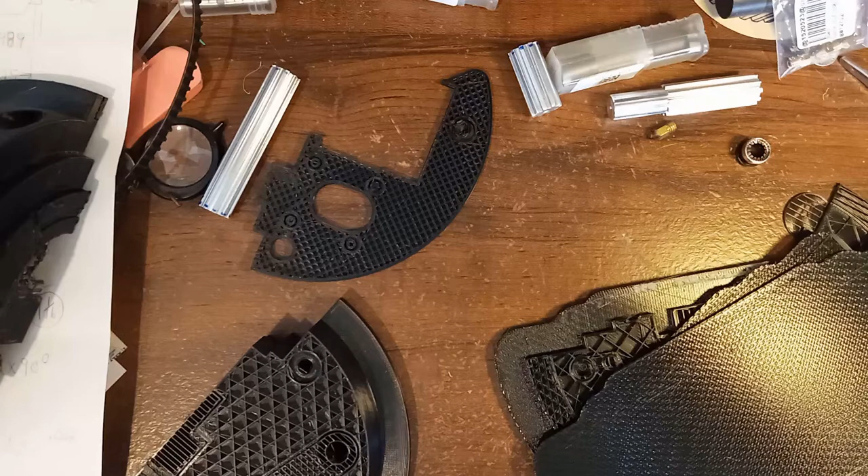Okay, I want to talk about what I've done so far. I had the 3D model and I broke it up into pieces, one half and one half. And this is the first part I printed.

And this is the one where the PLA was feeding into the tube and the tube was collapsing, and it was making this clicking noise. It was trying to feed the PLA through the nozzle, but the tube was collapsing and it was just clicking. It was trying to push it and it wouldn't do it. So it basically aborted the operation, and I almost had this done. Another 4 or 5 hours and it would have been finished.

So I fixed the problem with the tube. If you remember, I was going to take one of these. I was going to make a little extension on there. So I was going to take this part and I was going to cut it and screw it in there, put the extension on here, and then put the other piece on the top end so it would be further away from the heat source so the tube wasn't getting hot and collapsing.

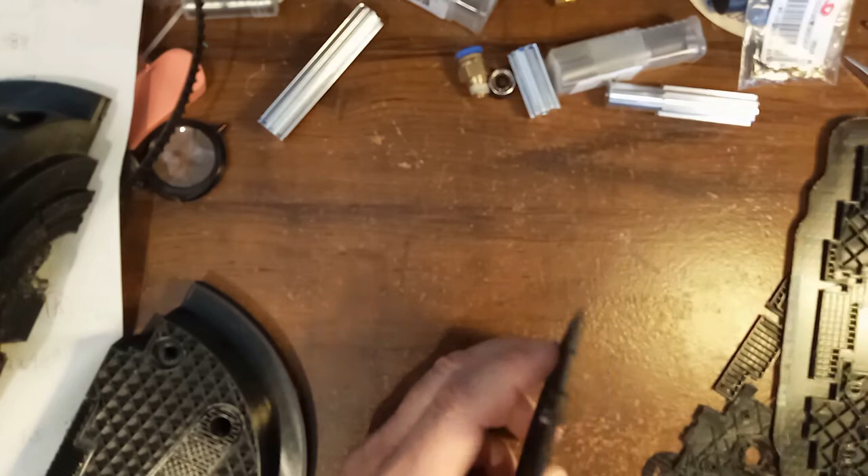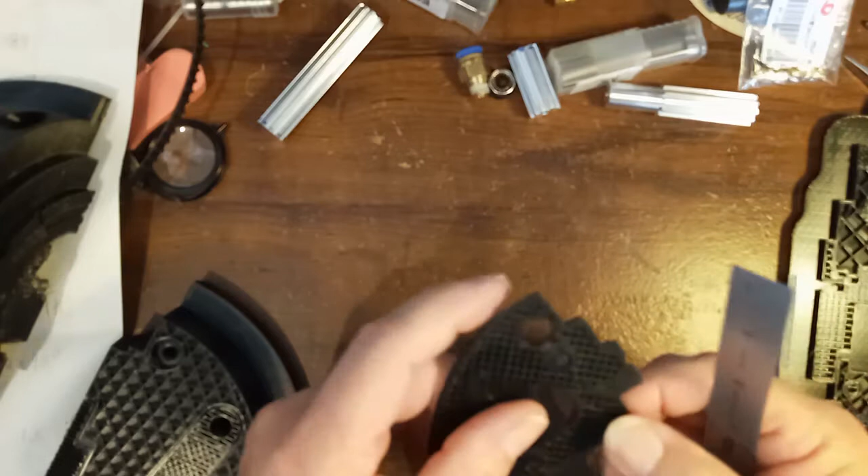So I tried printing it again with the coarser setting, and what was happening was that it was bowing. The part that sits on the plate, can you see that? It bows right here because this gets hot and it curls up. And it curled up here too. So I needed a wider area for this to hold that down.

Now when I looked at this one I printed before, I didn't notice it, but it's curled up here too. It also curled right here. Now this part remained flat, but this inside piece was curling.

So what I did was I went in there and I put these little tabs on here. There's a little thing you can do to put these little round circles wherever you need them. So I put these little tabs on here to give it more surface area to hold on to the plate.

But then it started curling here too, right here. I don't know if you can see that, but there's a little curl right there, a little curl right here where it starts curling up. What happens is the nozzle goes across there and it hits it all the time. So that didn't work out too well.

So they got this thing called raft. What it does is it builds up this plate that the print attaches to. And this is what happens. This is the raft, and the print builds up on top of this raft. And that seemed to be working really good. It gives it more surface area to contact, but it's still curling a little bit. But it's a lot better than what it was.

Now what happened here was that I was moving the box, and the card is attached to the top of the box. I have to turn the box so I could use the controls, but then I turn the box so that the PLA makes a straight line into the printer. And when I grabbed the box, I pulled the card.

Now the program is in the card, and it drip feeds into the printer. So when you pull the card out, you lose the program. So it stopped, and I couldn't restart it. I tried to restart it, and it didn't know where it was, and I ended up digging into the part.

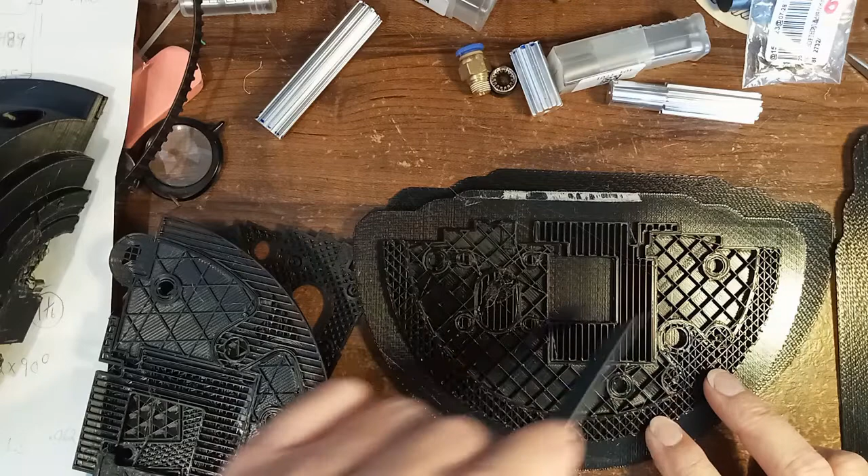So this part stopped too. Now this is about 3 hours worth of work right here. And what I did was I opened up, I put lines here instead. There's different patterns you can put as the infill, and I put lines because it makes a weaker part, but it decreases the print time. There's a lot of different settings in there, and I'm kind of learning it as I go.

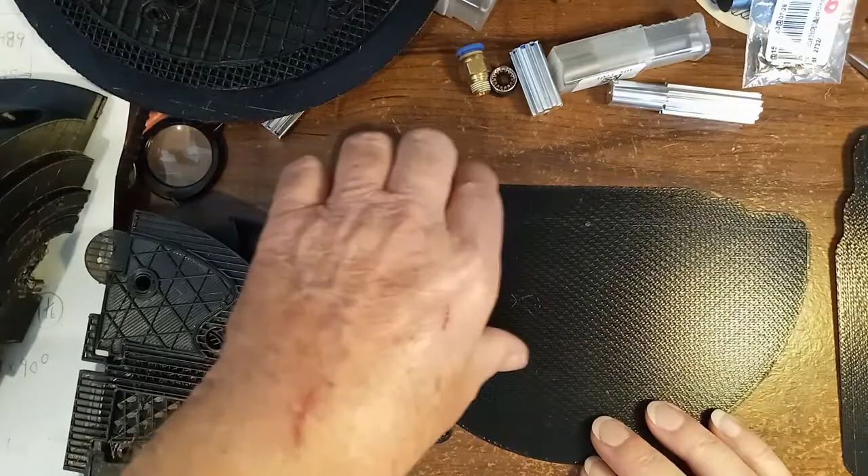But anyway, this raft idea was working pretty good. So I started it again. I started the part, and it got up to, it's doing the raft, and then it stopped right here. And I thought, well, that's kind of strange. So I started it over. This is like an hour and a half right here to build this raft. So I started it over, and it did the same thing. It stopped again right there.

So I figure it must be something in the program that when I accidentally pulled the card out, it disrupted the program. So I went in and I reloaded the program, and then it was telling me that the card was corrupt. So I guess when I pulled the card out, it didn't have a clean exit because it was running a program, so it messed up the card. So I had to get another card, reload the program.

And on the print you have different options. You have like better, good, not so good, and draft. So I didn't want to go with the draft, so I went with the not so good because I wanted to just print it to see what it looked like, to kind of get an idea on what needed to be done to it, and if I missed anything, I didn't want to waste a lot of time printing it to find out I got to print it over again and over again. So I put it on not so good, and I was able to print a part.

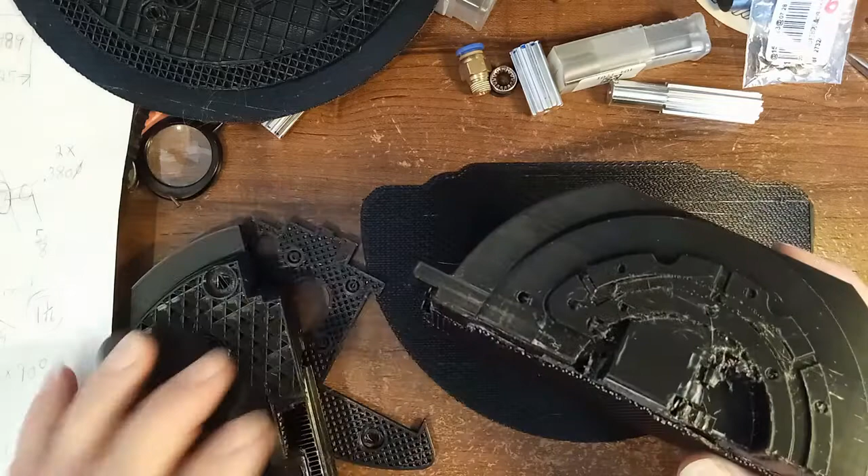So I was using the raft. I printed the part, and it finished the part, but it really came out, how do you say it, poor quality, because I had it set to not so good, and it turned out not so good. But it gave me an idea of what the part looked like.

But when I tried to take off these supports in here, I was battling this really bad. I was trying with pliers, this and that, and the quality of the holes was really bad, and the infill, the stuff here that supports this edge here, I couldn't get that out.

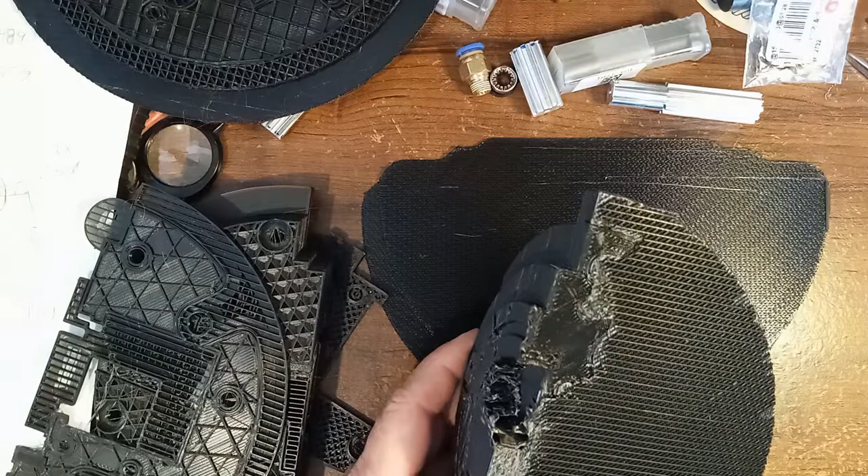Then this part was built upon a raft, and I tried getting the raft out, but what happens is that this piece here, which is the parent material, attached itself to the raft, and I couldn't separate the two. It actually melted right into it, and I didn't expect that. I expected it to peel apart. So I even had to use the chisel to try to get it out, and it just wouldn't work. But I got the part.

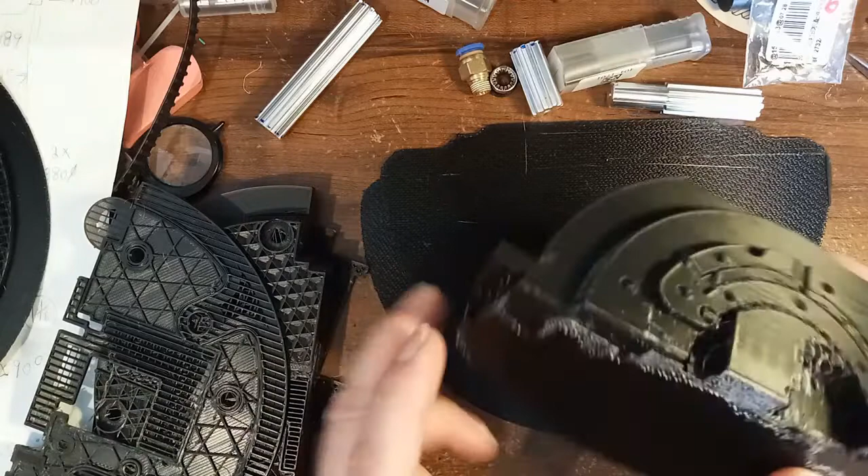So what I thought about doing was have to grind this off, and I couldn't get that piece out, couldn't get this piece out. So I think basically I'm gonna have to scrap this part. So we got to come up with something a little different. The raft idea was working. There was no warping in the part. It worked good. So I gotta think about this, but that was working good, the raft. But it just sticks to this part, so I just gotta figure this out.

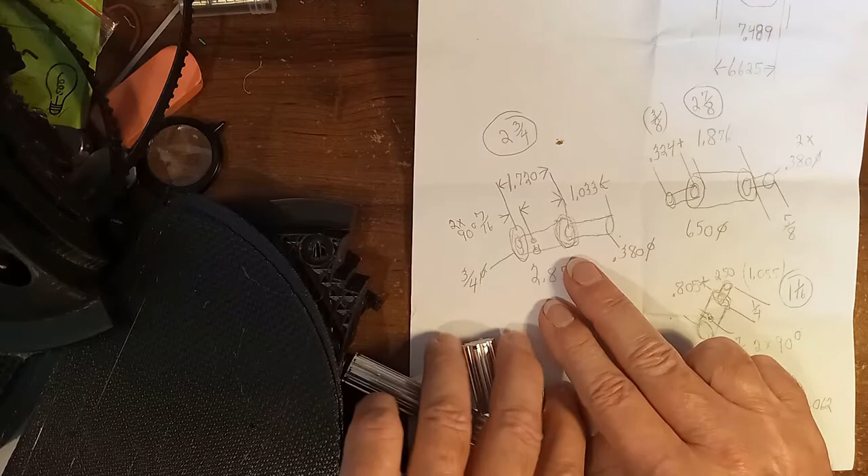And I got my stock that I bought. So I cut it into the different pieces, because this one piece here is going to be the one that goes on the motor, which makes it tip this way. That motor is going to be on the other side of this part. It's going to be back here somewhere. But then this one here is for the vertical motor. It's going to sit inside of here.

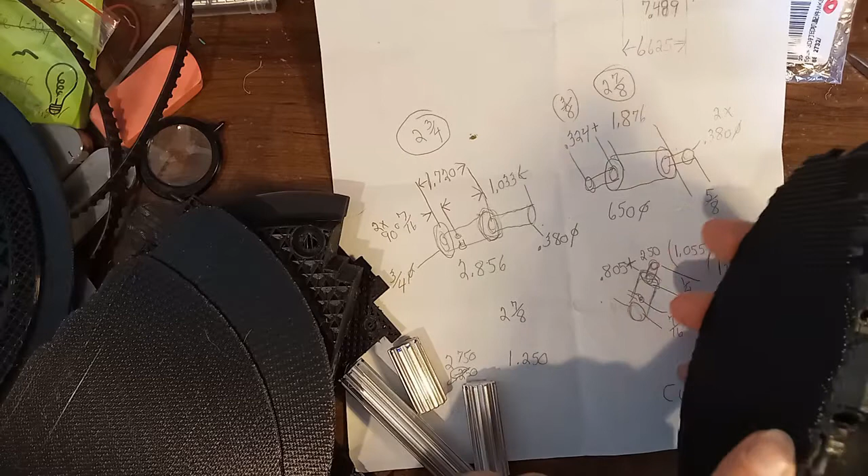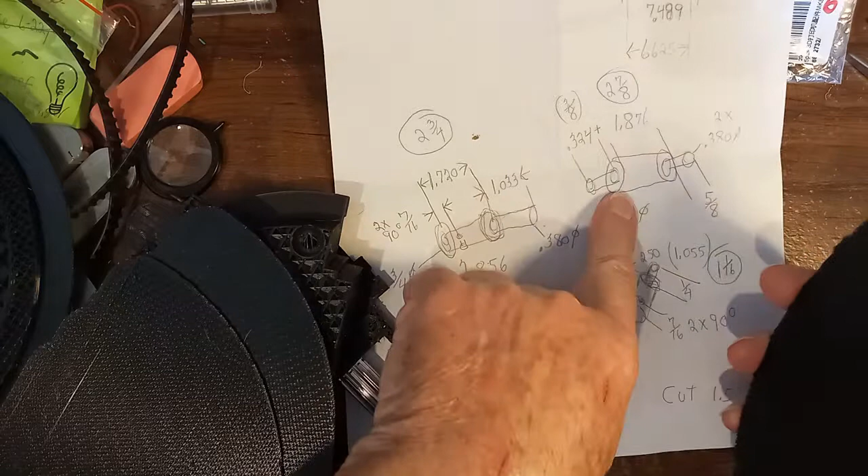Then the belt's going to come around here. It's going to go into the motor. That's what's going to make the table rotate. Now this one here, it's like an idler.

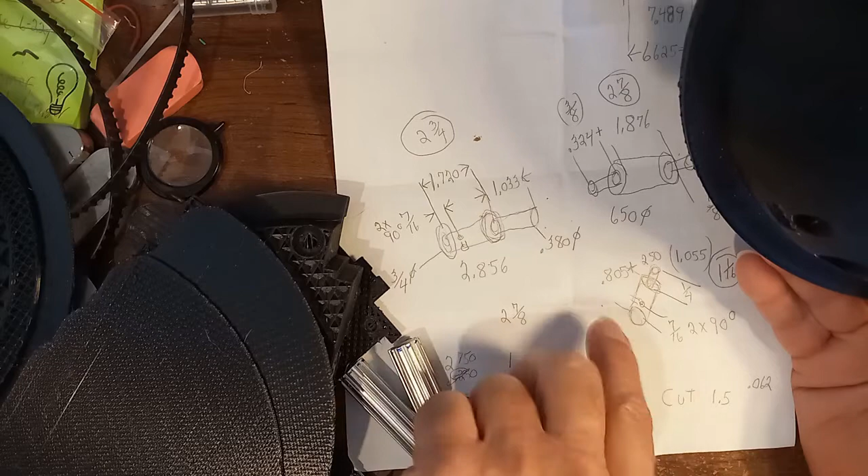It's going to go over here, and that's part of the one in the back where the motor's in the back, and I need to get the belt to the front. So there's a belt that goes around here, goes over here, goes to this pulley, this one, and that's what makes it go like that. Then this, like I said, this one goes on top. That's going to make the table rotate.

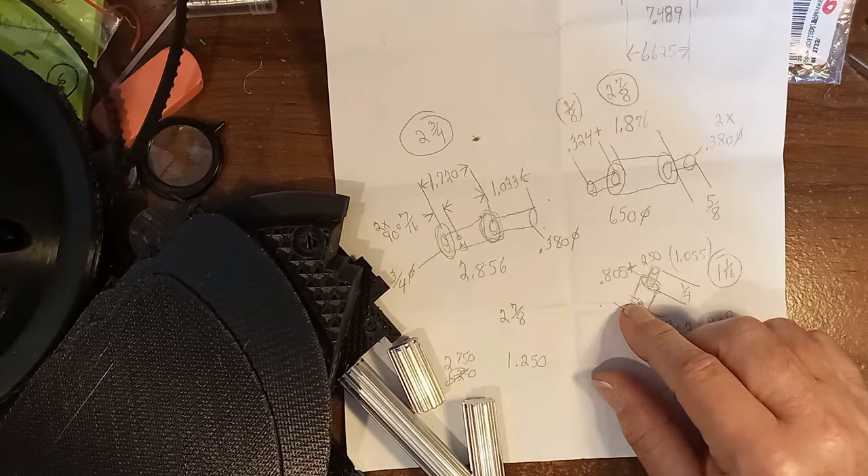But I was hoping this would work, but it didn't work. So I think I'm going to have to go with the regular setting, go with the good quality, and try it again, but I got to figure out how to solve this problem of it warping.

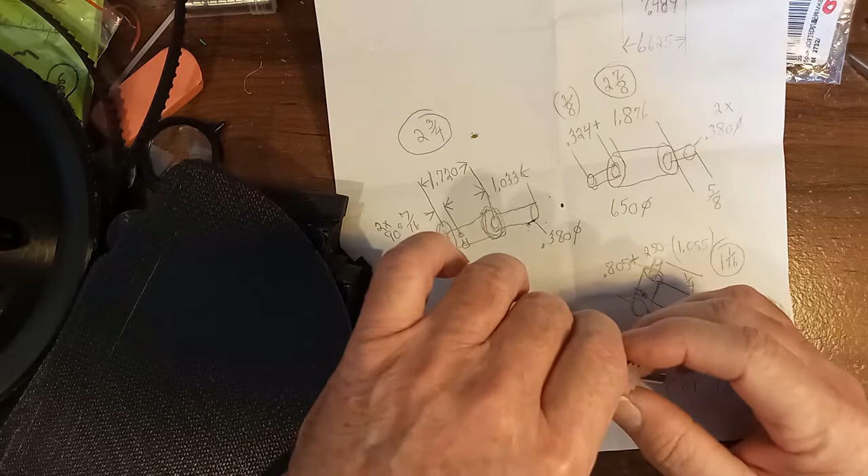But I got these cut. Got to bore a hole to attach it to the motor. Got to turn the diameters for the bearings. Well, it's not bearings, it's bushing. I got some brass stock, and that's going to be my bushing material because I don't want it riding into plastic.

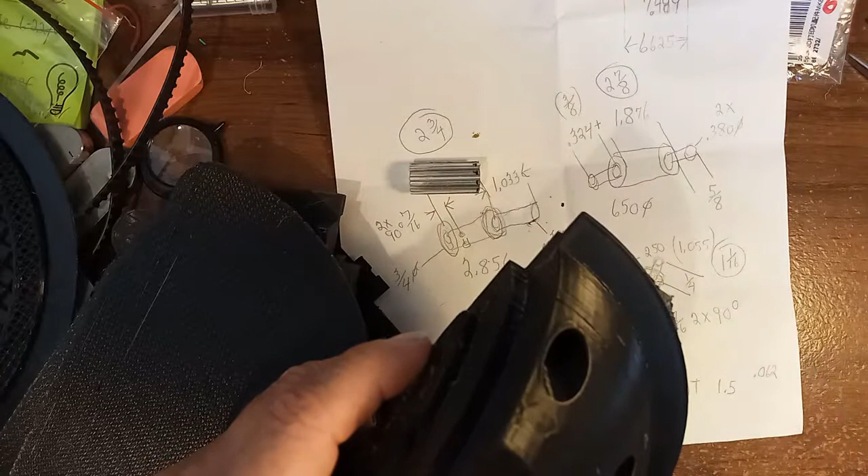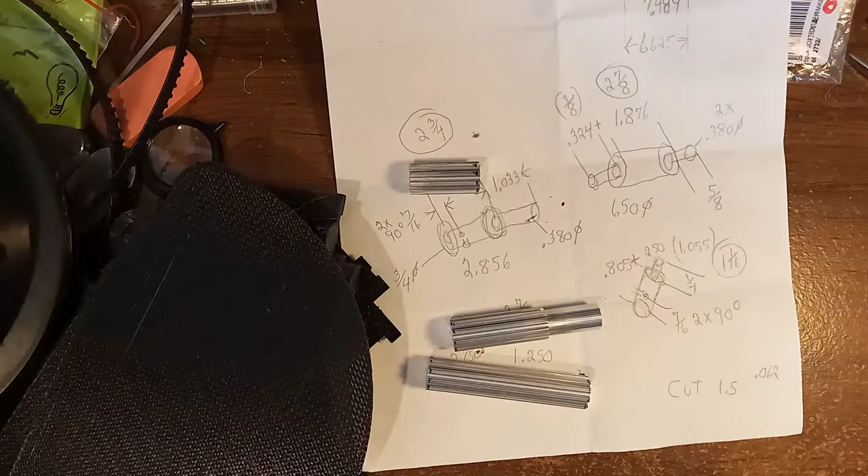These holes here is where this tubing's going to go. I'm going to epoxy it in there, and then these shafts are going to ride on that tubing, act as like a bearing material. This is brass, got it at Ace Hardware. It's a 3/8 OD with a 14 thousandths wall.

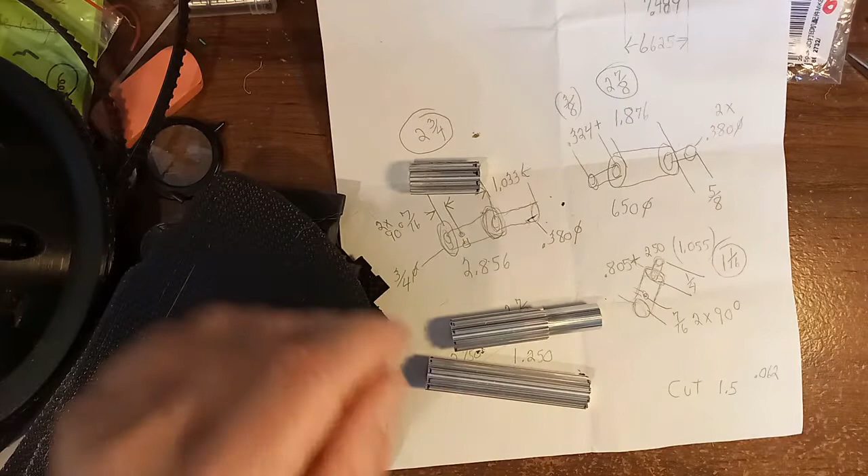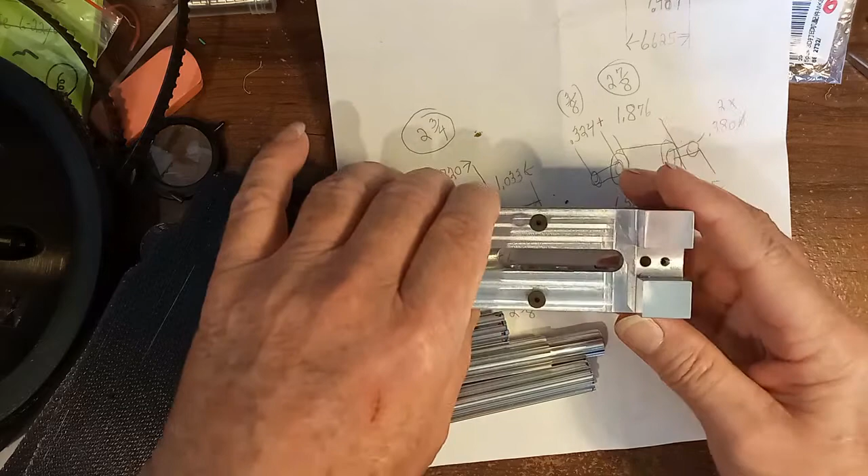And I got my vise, come a little bit further on it. Got the slots in it. Slot up here. Gonna put a steel insert in here. And I made it out of aluminum to try to get it a little bit light. I don't really need a steel vise, but I need the steel jaws.

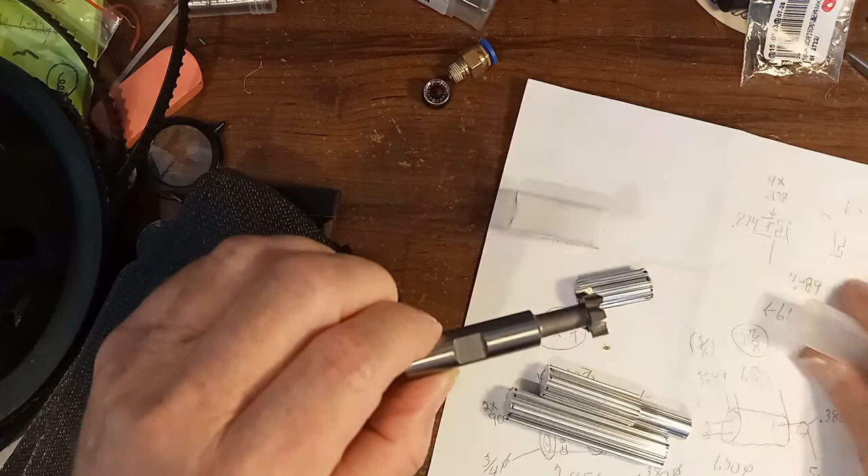And I got the cutters for my table, the T-slots for my table. So we're getting there. I got the little 45-degree cutter.

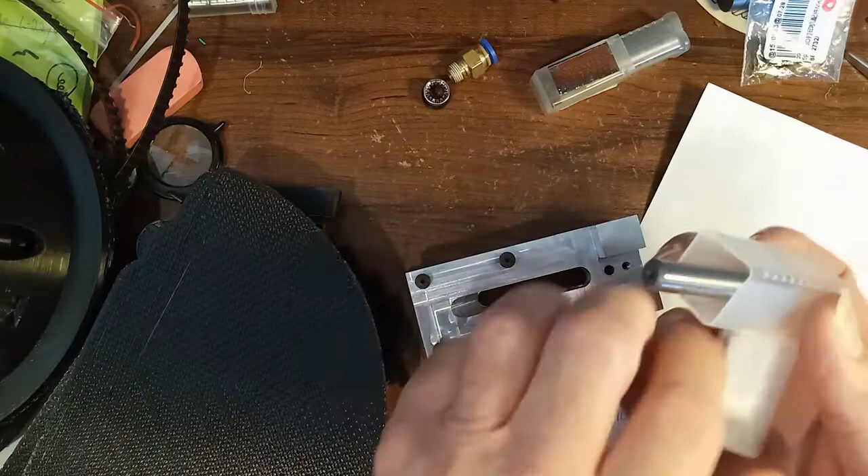Because you know how it clamps the end of the piece. So when I make this steel insert, I'm going to have a 45 on it, then a 45 on the other side, so whatever part I put in there, it'll grip it to keep it from flying out. And the thing about the steel insert is I can also make one with just straight jaws, so it doesn't have to have the 45 in it. That way I can just grip on a little piece of part if need be.

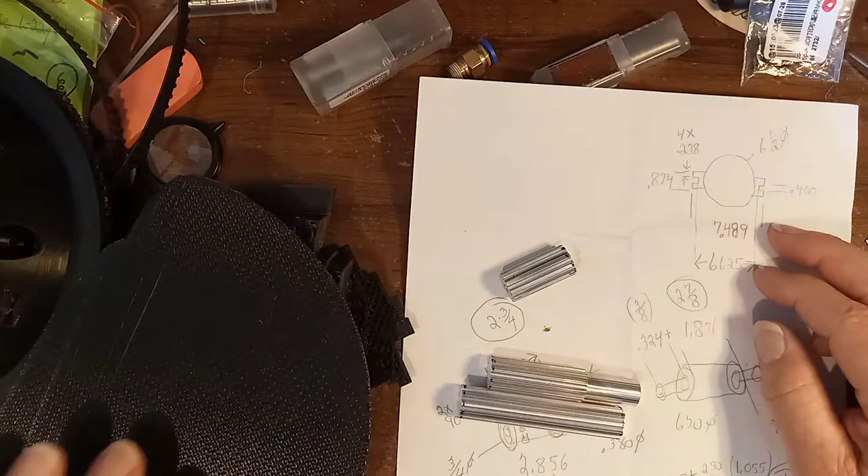And yeah, when the power went off, it flickered. So what I ended up doing was I got a battery backup to install in the system, so I won't have that problem anymore where if the power flickers, it knocks out the unit.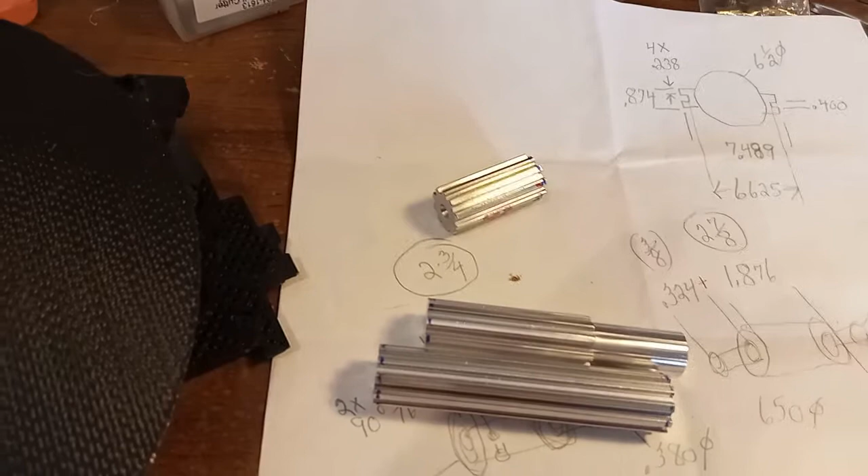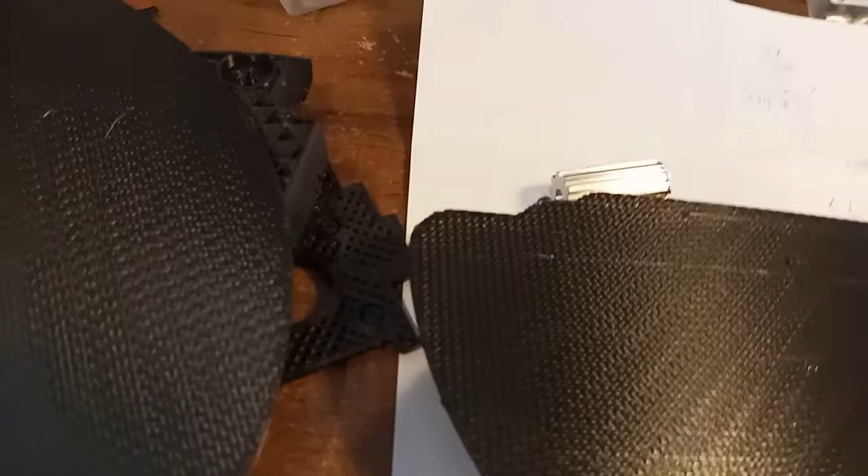It's not that the unit will stop, but it remembers where the program ended, and it'll start again. But the issue is that when the power goes off, the heating elements go back to 0. So if this is on the plate and the heating element goes back to 0, then this piece will not adhere to the plate anymore, and it'll come off or come loose.

So it's not an issue of the power going off and coming back on if you happen to be there and catch it. But you know, when you got these long runs and they're 18-hour, 20-hour, you can't be sitting there watching it all the time. So that's why I got the battery backup, so that if it goes off, it'll just stay on, because I don't want it going off and then losing the heating element and then the part not sticking anymore.

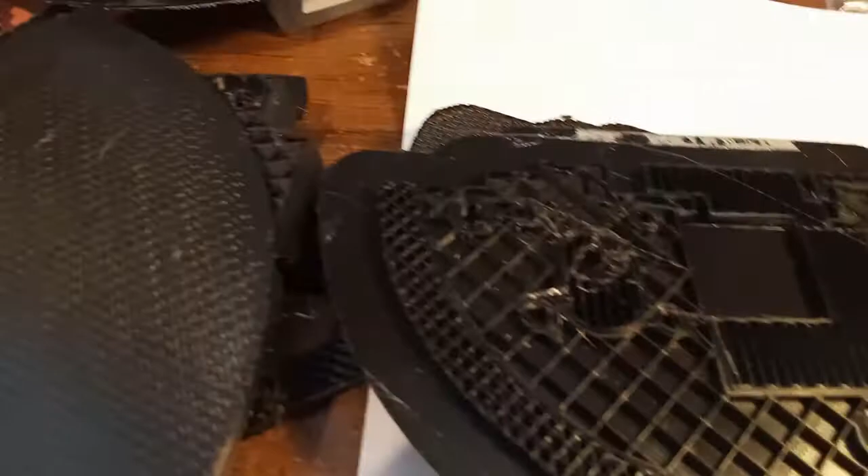And then when you resume it, the part comes loose. And that's how you take these parts off: the bed is heated and these parts adhere to the bed, and that's what keeps it down. So when the bed isn't heated, that's how you take these off, because you let the unit cool off and these parts will come off because of the difference in the temperature. So I got that battery backup.